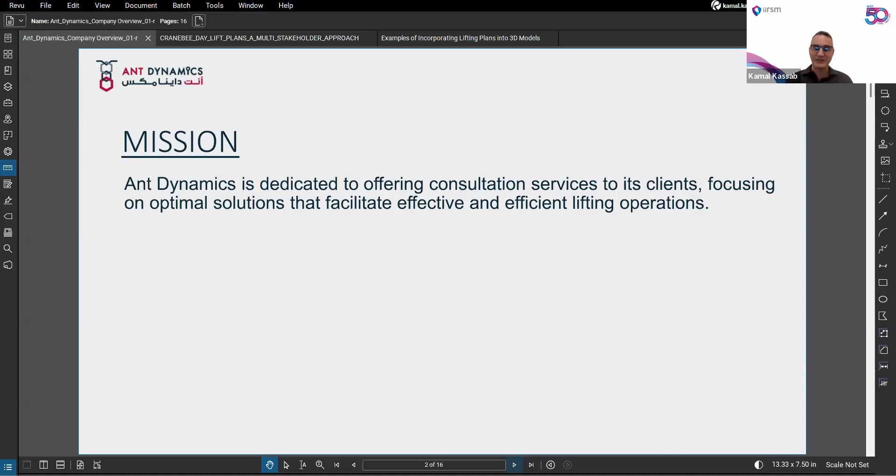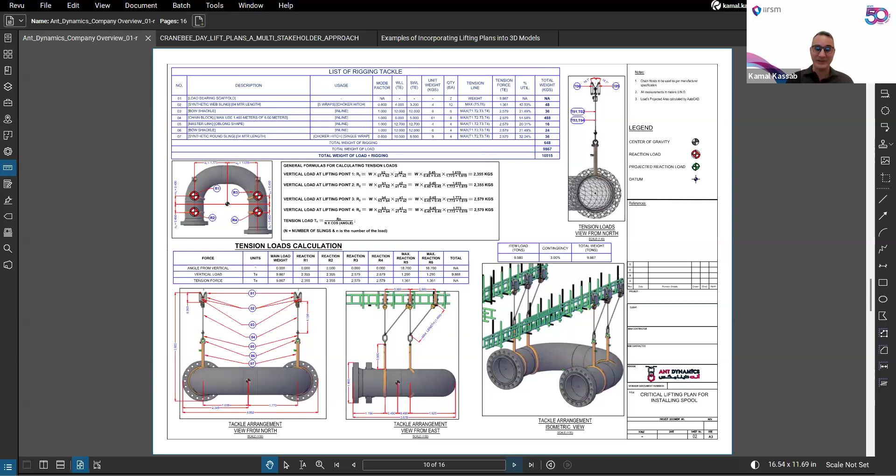We do a lot of lift plans for single crane lifts. We also do multi-crane lifts, and alternative lifts. For example, in this case, we have a skidding operation of equipment going underneath an existing precast foundation. We also provide services for rigging. Yes, for many people it's an everyday, very easy task. However, in some cases, when you have a large spool going underneath a pipe rack, it's not so easy, and the client usually has the right to ask questions about how you're going to bring this piece of spool inside their pipe rack.

Also, by using specialized software related to lift planning, we can export to 3D models, like here. And I will show at the end of the presentation a recently added feature, which is now becoming more and more prevalent, which is to leverage reality capture, such as drone mapping, into lifting plans.

Why Ant Dynamics? Well, to be fair, I think it's safe to say we are competent engineers to take care of this specialty field. Not every contractor understands or has the ability to deliver projects on time, and a lot of the hiccups, especially at the start of the project, are due to insufficient or problematic lift planning, and how to convince the client that you really know what you're doing and that your plan is sound and safe.

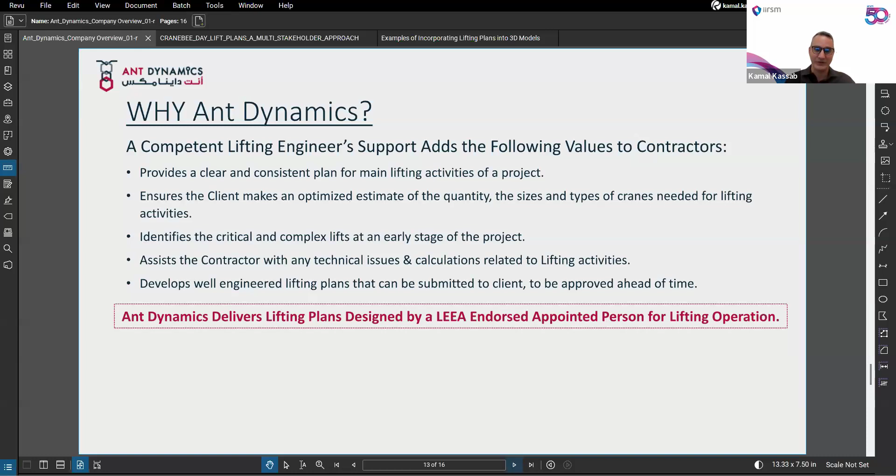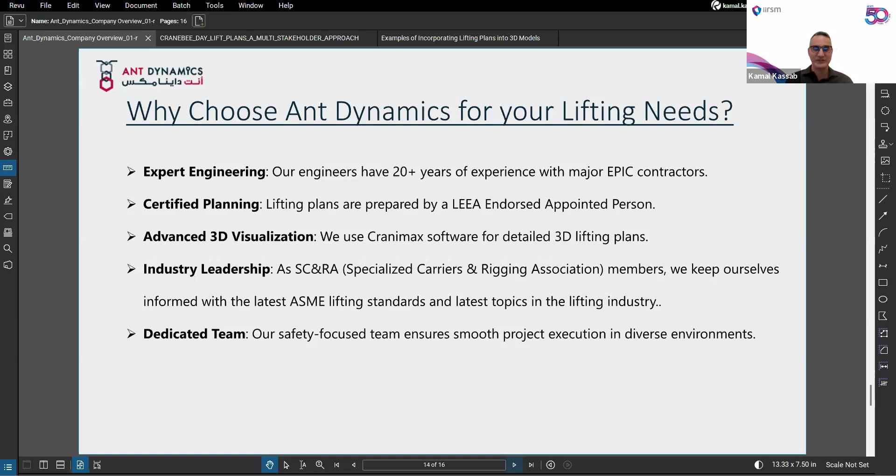Expert engineering, certified planning. Obviously lifting plans have to be endorsed by an LEEA-endorsed appointed person, which is the case. I've also taken a lot of certificates with LEEA, and I attend a lot of conferences related to LEEA and to lifting, so I'm always up to date with the latest trends. For example, the Specialized Carriers and Rigging Association conference, I travel every year to this conference and workshops to understand what's happening. Also, as the agent of Cranimax in this Middle East region, we are always up to date with the latest innovations in software and how to leverage it to improve lifting plans.

I will start now and go ahead with the presentation itself. Are you able to see the presentation? Yes. A multi-stakeholder approach to lift planning development. Can you see that? Oh, yes, we can see that.

Very good. So let's get started with this very interesting presentation, and I want to challenge or help other people understand that lifting plans are not just for lifting engineers or the safety officers or the safety supervisor or the rigging supervisor. There are different levels of lifting plans, and we have to understand which lifting plan is meant for whom. So let's get started, and I hope you enjoy.

The role of lifting plans. Lifting plans are essential for safe lifting. Everybody knows this. I think it's an opportunity to analyze the risks, collect the data, and basically plan the lift.

So as an analogy, if you are going on a flight and the captain doesn't have a flight plan, would it be safe to fly? Would you feel safe flying the plane? Wouldn't the captain want to know what the weather is like, if there's fog in the other city, the wind speed, the weather conditions? They have to check the fuel, they have to check the luggage, the weights; all of that is the flight plan.

Similarly, when you want to do a lifting operation, it is always good to have a plan to know what you're going to lift, what is the weight, what is the path you're going to go through, has the ground been checked. This is routine, but do we really understand this? A lifting plan has a purpose. It's not just mandatory because the client says so. Because if something does go wrong during lifting, then you are in trouble.

Then gravity will say, "Wait a minute, we're gonna let this thing fall over," and then chaos will happen, and whatever pennies you were trying to save by choosing to do something without a proper lifting plan or without the proper assessments is very costly. So that's why it's always good to have lifting plans, and that's why a lot of clients rightly demand that their contractors show them a lifting plan to demonstrate that they know what they're doing.

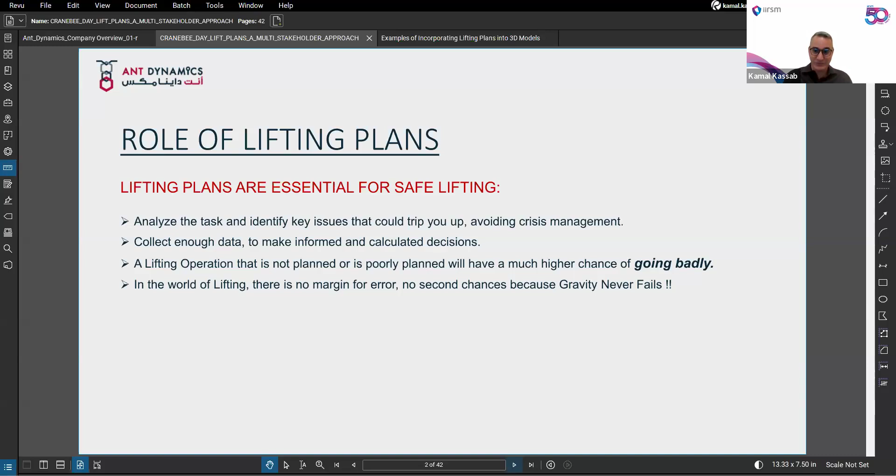There are a lot of requirements, industry standards. Some of them are by procedure, some of them are standards. So as an example, international standards, I can think of the ASME P30.1, which personally is my favorite because it talks a lot about lifting plans in detail, and it talks a lot about how to calculate and how to reach the right conclusions. BS 7121 obviously is another good standard. However, I do feel that more work has to be done to talk about the lifting plan drawings as a whole.

Where I work, which is in Qatar, a lot of lifting plans and procedures are found in the company procedures of the plants that actually allow or have work within their plants. So, for example, there is the Qatar Energy lifting procedure called Corporate Lifting Equipment Regulation. There is the Qatar Energy LNG Code of Practice for Lifting. There is also the new, recently added, very detailed major project lifting Code of Practice procedure, which I am now working on. It is very similar to the PRC 013. However, it does differ in the details.

And for anyone taking up a project with Qatar Energy LNG, I would definitely recommend that you read this PRC 015, because if you don't understand it very well, you'll be in for a lot of surprises. So it's good to know before you get started. Then there is the GTL project, which is also one of my favorite procedures because it's very well written and covers almost every aspect of lift planning.

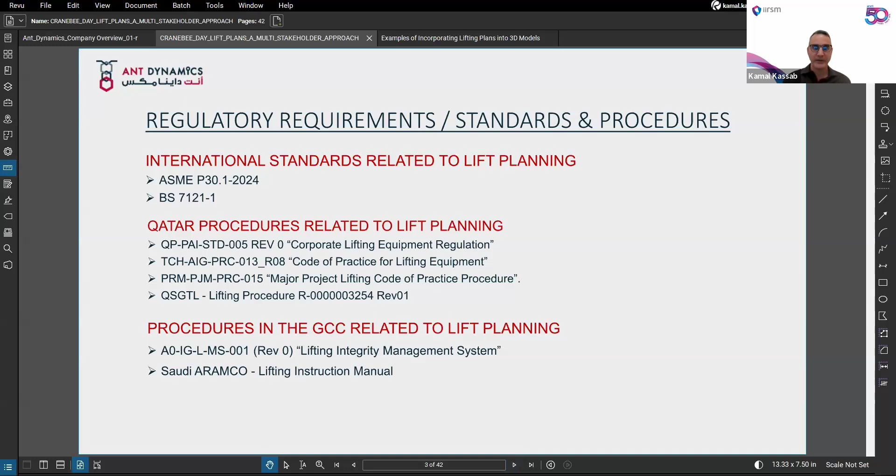Having worked with different procedures and standards, I have noticed the following. Most of the standards talk about the workflow, the roles and responsibilities, the QA/QC, and a lot of documentation and certification. So for example, this is the ASME P30.1 2024, which has been recently updated. This 2024 is a new issue; it's been around for about a year now, a little bit more. They talk about how to categorize lifting plans and the role and duties of everyone involved.

The nice thing about it is that they talk in depth about ground bearing pressure and ground bearing capacities and how to do the test, not just what the values are. So it's a very practical standard, or best practice standard. It is not compulsory, but it is a very good guide. And they also talk about lifting plans as a drawing, the bare minimum information that needs to be there.

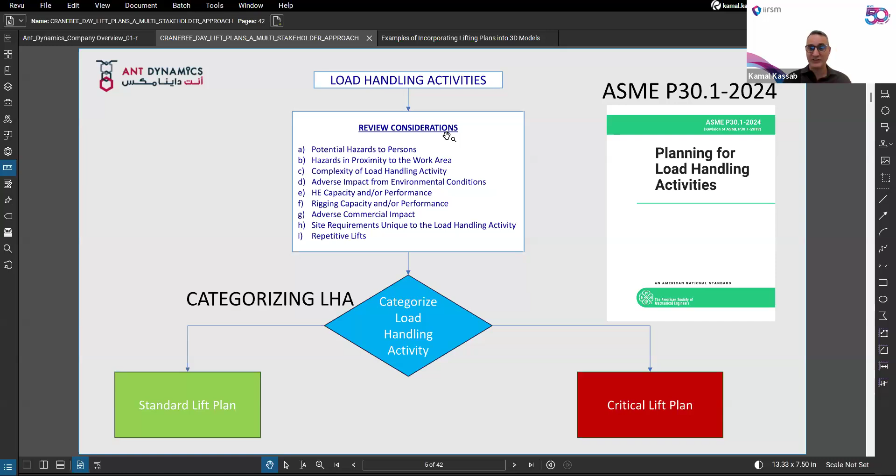However, despite reading over almost 100 pages of this procedure, till today I do not see a clear-cut understanding of what a lifting plan must entail. So you see a lot of people talking about lifting plans, but everybody understands lifting plan differently. A planning engineer would think of lifting plan one way, whereas the site engineer would look for other stuff, and the crane rental company would be more interested in other things. And hopefully by the end of this presentation, it will be clear to everyone what everybody should see and what is the amount of detail that should be given per lifting plan.

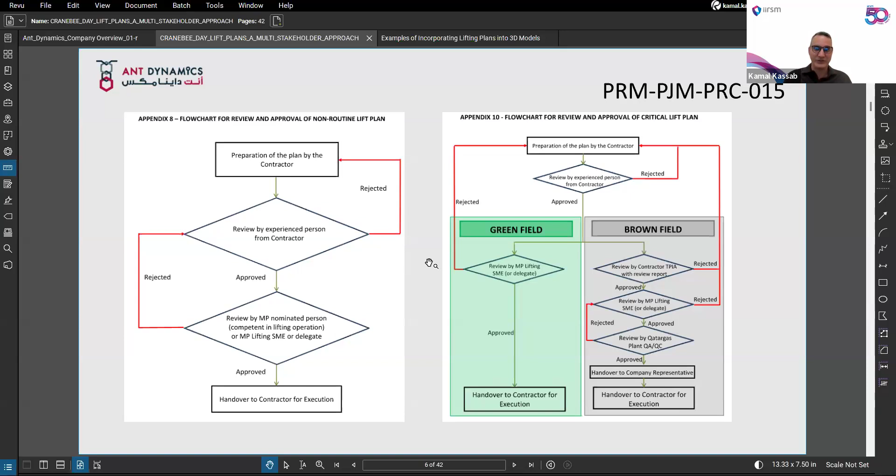So this is what I just mentioned. They do not focus on the specific requirement of the lifting plan drawings. And the lifting plan drawing is the jewel of the lifting plan package. For example, if I have to lift a compressor, I don't just give my client a drawing showing the crane position and the compressor and how I'm lifting. No, I have to give them a package which would contain a method statement, a cover sheet, certificates of the slings, of the rigging, the shackles, the crane certificates, the load chart, the crane operator, all of that. However, it is impossible to do a package without the drawing. So the drawing is the jewel of the lifting plan package.

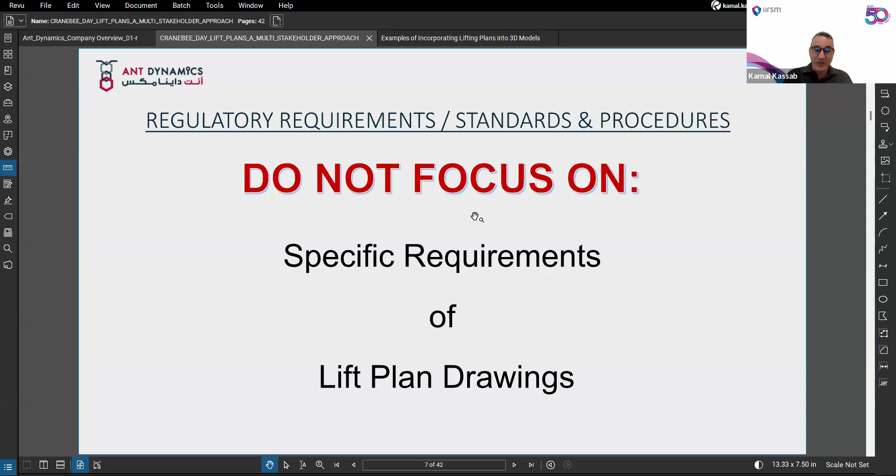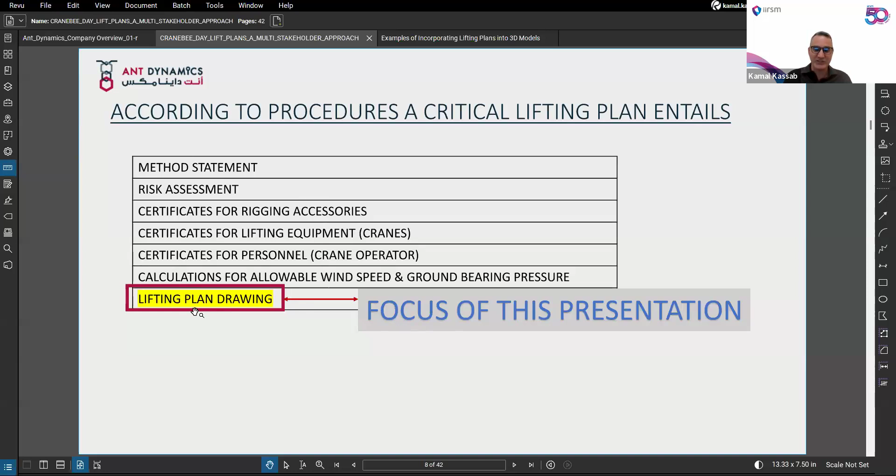So here again are some of the parts of the package. Of course, every client may request more information. However, all of them will look for this part which I highlighted, which is the lifting plan drawing, and this will be the focus of this presentation.

So there is a myth: a lifting plan is a safety requirement only. That's the myth. Actually, no. There are many stakeholders involved in lifting operations. Even those who are not on the field directly are being affected every day by the lifting operation. So it's important to always identify the key stakeholders. I'll mention some of them.

So you have the lift directors. In this case, it could be the lifting superintendent, the lifting engineer, appointed person, the crane owner, the crane operator, the riggers, the construction managers. Of course, construction managers are affected because they have to deliver on time and in a meaningful way. The planning engineer, the cost engineer, the crane rental company, all of these are affected by a lifting operation, even if they are not standing next to the crane during the lift. I can mention more.

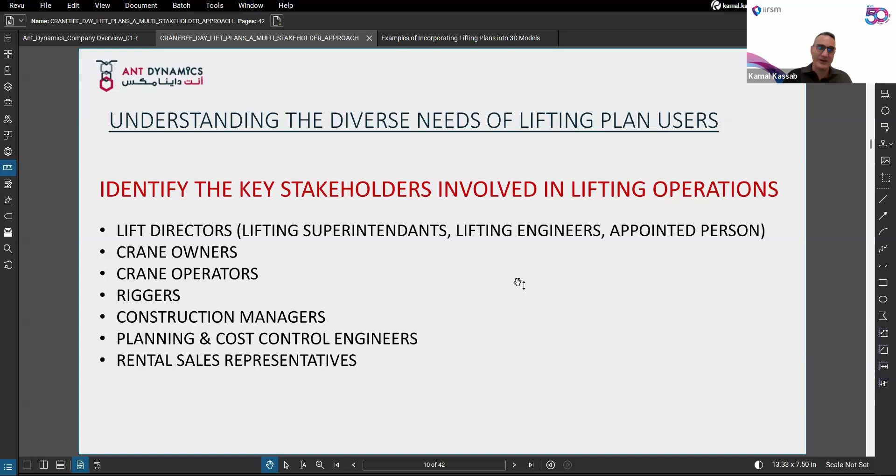Let's say you are in a neighborhood. Like now, there's a crane next to a hotel that I'm living next to, and this crane has blocked the road. So all the people in the area have to now do a detour, which is part of the reason I just arrived. What used to take me like 5 minutes now takes me around 20 minutes. So cranes are huge pieces of equipment, and they will always have an effect whenever they are working. They will always influence other areas, even those people not involved in lifting.

Developing a lifting plan. A lot of companies who work in lifting have this mistaken assumption that the lifting plan is one go. So you give the drawing to one person, and this person is expected to develop the plan. Okay, I have a foundation to lift. No problem, give it to the lifting engineer, he will make it. No, and no. Lifting plans are the result of an iterative cycle. A lot of communication, a lot of back and forth has to go on.

So the first part is to gather the information. Gathering information means knowing what is in the surroundings, getting the weight of the item you're going to lift, understanding the limitations in the area. Then the person doing the lifting plan, which I would call the supplier in this case, has to provide a rough sketch: okay, I plan to put my crane in this location, gets feedback, a lot of feedback, and this is an iterative part.

Then submit the detailed drawing, and again wait for comments, maybe from the main contractor, maybe from the client, maybe from the main stakeholder. So it is important to remember that lifting plans are not done in one step. They are the result of an iterative cycle, in some cases many iterative cycles, and a lot of discussions.

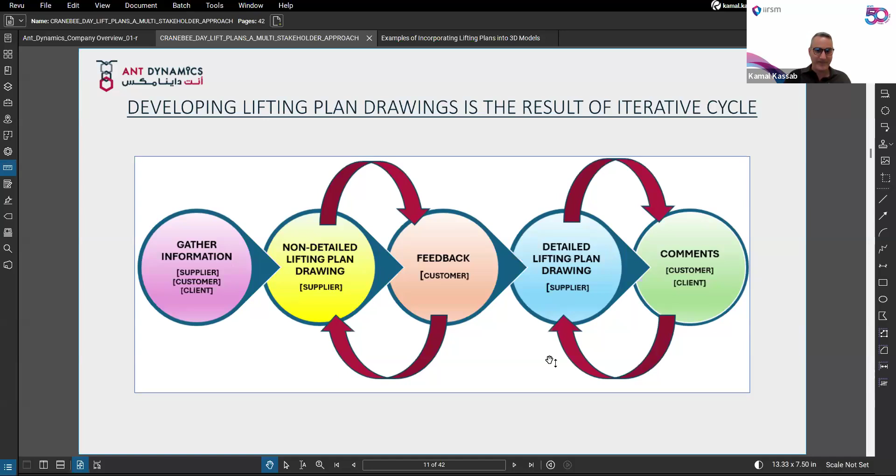So I will talk a little bit about the limitations of the conventional way, what I see a lot of. So a lot of people, what they do, they have a draftsman. This draftsman has to do the drawing, takes the feedback from the supervisor, and back and forth. The problem with this method is that you cannot expect the person making the drawing to know all the givens, all the data that will affect the drawing, that will affect the lift.

So, the conventional way is to have a draftsman taking instructions from an engineer or from a supervisor and do the drawing. So the draftsman has to do at least 50% of the work and the decision making, such as selecting the crane, selecting the crane configuration, and then the person who is in charge would have to review that drawing.

There are many ways that could go wrong here. For example, this takes a lot of time. It's a laborious effort. There isn't too much time for iterations. So you'd have to wait until the final drawing is ready. So I have to wait for the draftsman to finish drawing the crane, put the slings, put the shackles, put all the details, in one go.

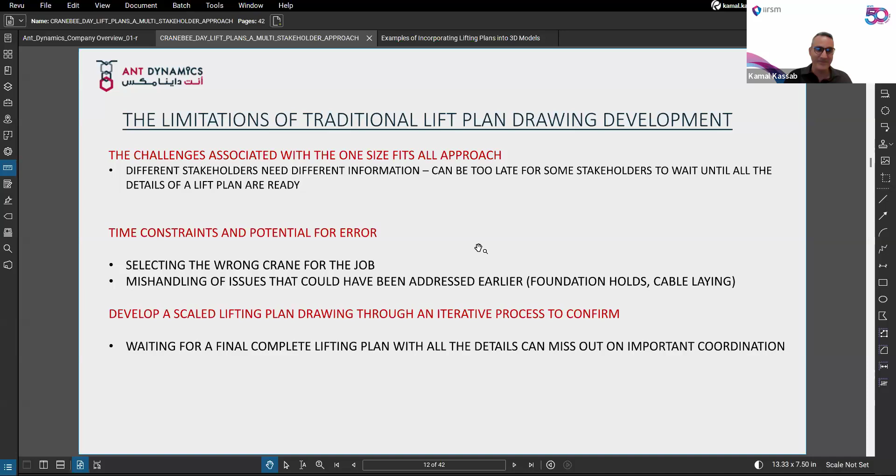So I have another proposal, which when I quote to other companies, this is the process that I would prefer. Like other digital construction, like building information modeling, there is something called level of detail. And what this allows is better planning, more focus on planning, and then to develop the details as the project goes on. It is easier for someone like me to develop a high-level lifting plan rather than to focus on the nuts and bolts of the detailed lifting plan.

So it's easier for me, for example, to develop many lifting plans at a very high level for the same project, all right? And I call this level 1. At this stage, I would choose the crane type and the location. So if someone tells me I have a compressor to lift, we know that the crane has to be located in a certain area. And I would say, I need a mobile crane, or a hydraulic crane, or a crawler crane in this case.

And then we can sit and focus on the exact size and stuff. Then as the project goes, here I'm putting 6 months before. This is the ideal case. 3 months before the lift, you should have decided on the crane type, the size, and the location, which means that I need an all-terrain crane, a 250-ton all-terrain crane, and I need it to be in a certain location.

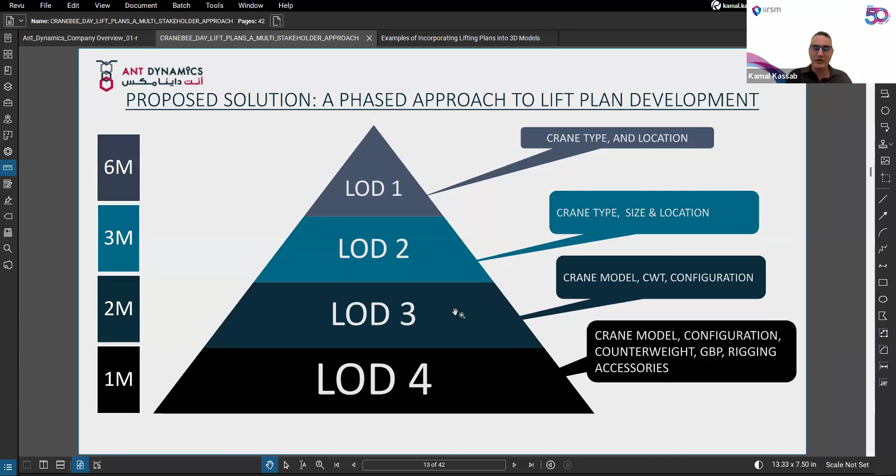So what this means is if you keep waiting until the last minute to give that one lifting plan drawing in detail, the contractor may find themselves ending up paying more, with more frustration and more delays—just not an efficient way of saving money.

So a little discussion about each one, I'll just go briefly through these. I had to write everything down just to keep this presentation detailed enough. However, I'll skim through this in detail.

Level of detail 2, you'd have to know the crane size and the beneficiaries of this—the crane owners, the construction managers. So let's say I want to hire a crane, you would tell your procurement or subcontracts department, please start looking for a crane in the market, I need it after 3 or 4 months. That will give your guys a lot of time, enough time to go and make their inquiries and select the best price rather than wait for the last minute and rush to get a crane.

Phase 2, the detailed lifting plan, level 3. By this time, you know which crane you want to get. Again, you have more details, more information, and you start honing in on the planning stage.

Phase 3, which is to actually execute the work. Basically by this stage, all the details are there, and by now you are executing the work. It is too late by this stage. So if you're going to do a lift after, let's say, 2 weeks, and you haven't decided on the crane size, you haven't decided on the slings and shackles you're going to use, then I would say you are already in trouble because it's too late to make any big decisions that may facilitate your lift.

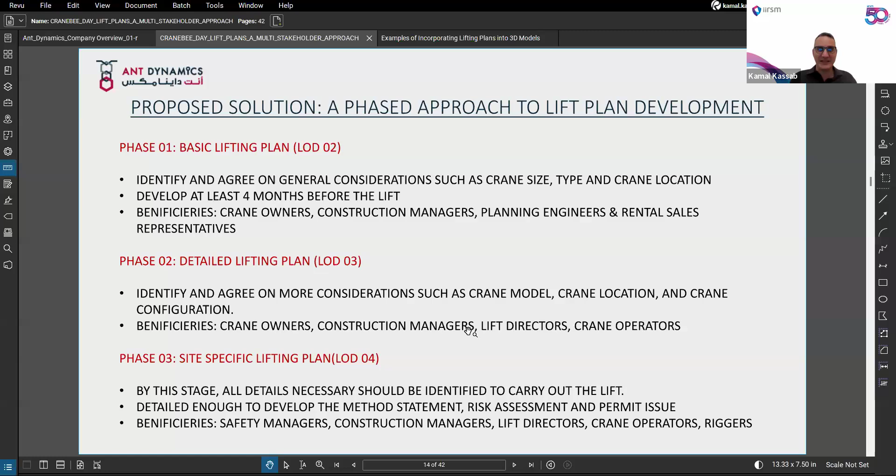Beneficiaries of all of this are the lifting managers, site managers, the lift directors. Really this is a way of understanding that you have an overall approach when you think of lifting plans—keep in mind that there are many people, many stakeholders involved, so the approach would change.

So let's start here by talking a little bit, showing you some examples of lifting plan drawings, level of details. The definition of a lifting plan drawing: it's an A3 size scaled drawing. And I say scaled—it has to be scaled because without scaling your drawings, you won't be able to determine the clashes properly.

Sometimes I see people trying to get away with sketches, like drawing a box here and lines and arrows and whatever. Yeah, that's a schematic, that's not a real lifting plan drawing, and that's not really going to give anyone a clear idea of what's going on. Chances are, if you take this piece of paper to the site and try to apply and execute your lifting, you're going to be asking your lifting supervisor to start improvising, to come up with a solution while standing on their feet, under pressure.

So really, in this case, you are transferring the responsibility of the lifting engineer, or the party that's supposed to provide the lifting plan, onto the lifting supervisor. And in some cases, the lifting supervisor will transfer this responsibility onto the crane operator. Then you end up saying, okay, I have the permit, but the permit doesn't match the reality.

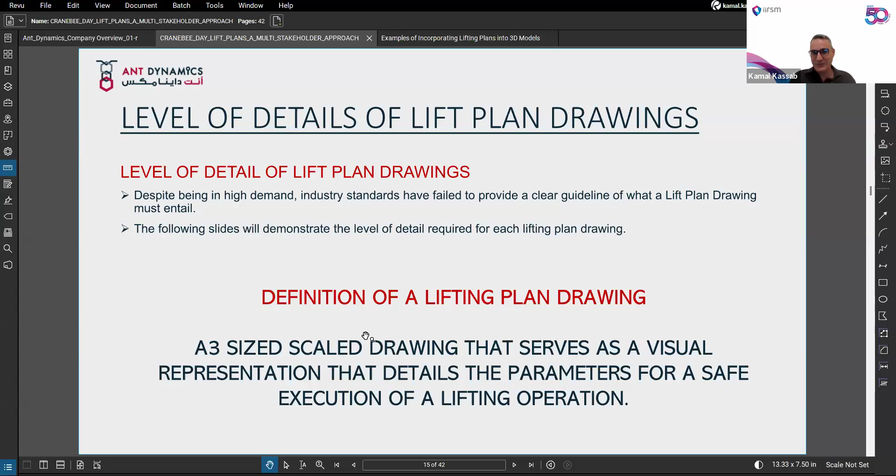Personally, when I do my lifting plans, I don't just do it to get the approvals. I do it because I think about the end user, the riggers, the rigging supervisor. I want to make sure that there's nothing in doubt, and if they see the drawing, they would come back with meaningful comments to make changes in case there are any. So it's important to have your lifting plan drawing to be as clear as possible and to be submitted or shared as early as possible.

Here's an example of a level 1 detail lifting. This is like 1 year before the job. This was given to me a year before, this job hasn't even started. So the project manager was wise enough to say, look, I want a very detailed, not too detailed, but enough information to plan my crane setup, where it's going to be located. So here you can see the crane, you can see the type of the crane, the size of the crane. And this is mainly for the project manager, project engineer, the planning engineers. This is even before the supervisor, the rigging team comes to site even, before they even mobilize the site.

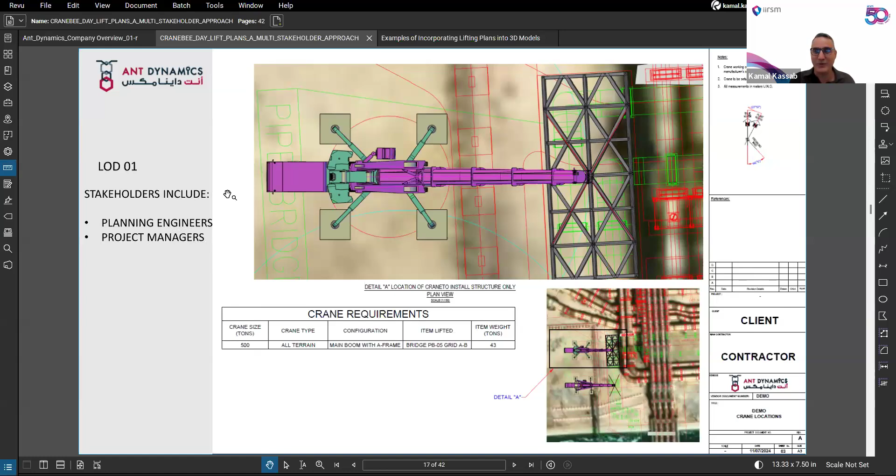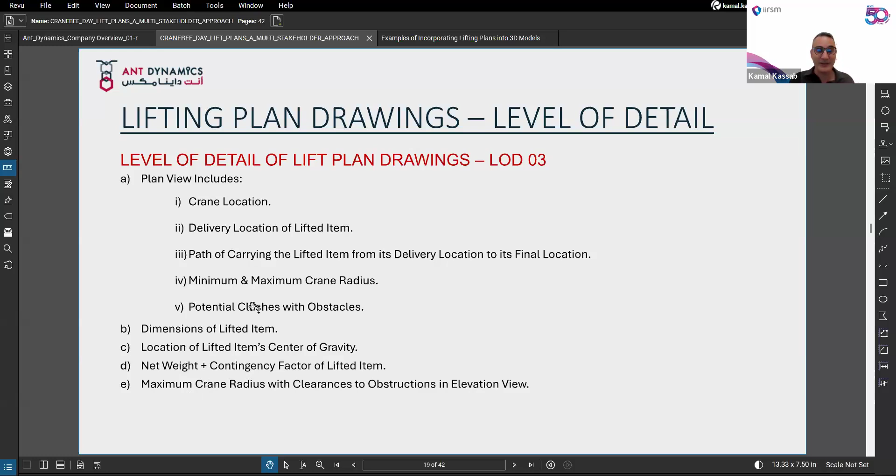Then you have the level of detail 2. So in this case, you have the crane location, the dimensions of the load, the minimum and maximum radius, the crane type, the boom length, the configuration. So you have a little more details than what you just saw earlier. A level of detail 3, a little more details than level of detail 2. So here you have, for example, contingency factors, the location where you're going to pick up. So this would really help

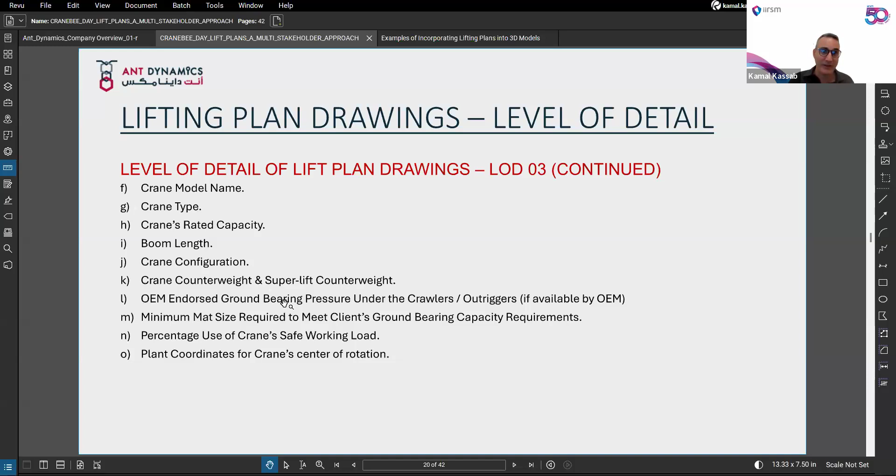the planning team. And at this stage, for example, the procurement would have enough information to go and search for the crane in the market. So you have the boom length, you have all the ground bearing pressures, so your civil team can go and check if the ground is good enough or not. Percentage of the crane safe working load, so you know that this is going to comply with your client's requirements or not. And it's enough information, I would say, for proper coordination with all other disciplines.

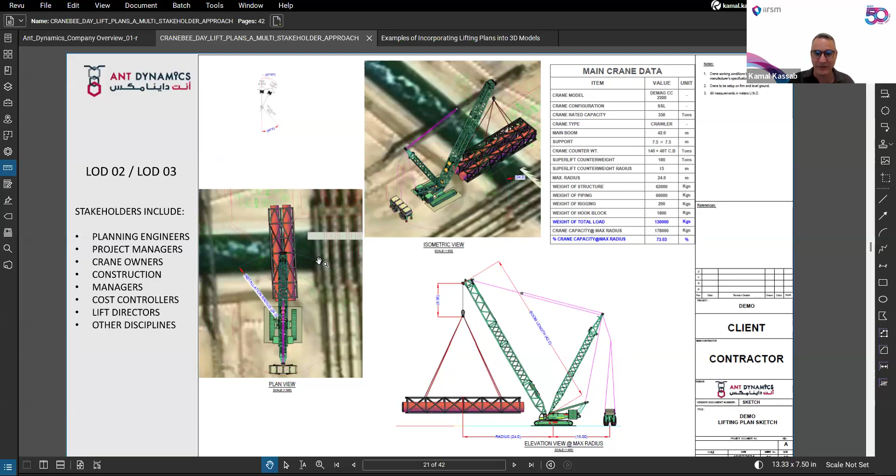So this would be available, let's say, 2 months before the lifting takes place. Now for the full level of details, and this would vary depending on the project and depending on the client. So if you're working with Qatar Energy, they would make some requests. If you're working in a brownfield area, the client would have another set of requests. If you're working with Qatar Energy LNG, for example, or with British Petroleum, they would have another set of rules. Shell have another set of rules. So at this stage, level 4 detail, it is very important that you understand your client's requirements.

It is very important, before you start even mobilizing your cranes, to know what requirements your client needs to see, to feel confident that you can do the lift. From this level of detail 4, and sometimes level 5, you use this drawing to start preparing your package to get the permit to go ahead and do the lift.

I'm not going to go through all the details here, but at this stage you should be able to point out potential clashes with existing obstacles. For example, if there's a tree, a light post, or a structure in the way, all of this should be highlighted - actually even in level 3. The exact location of the center of gravity,

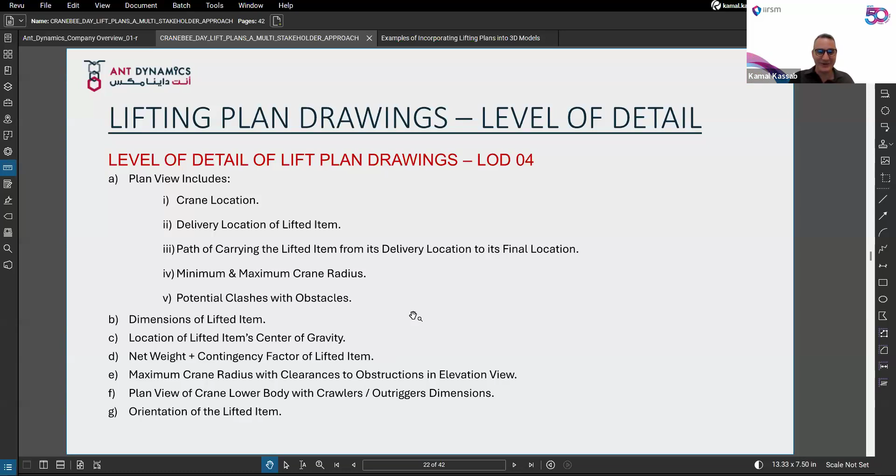and the orientation of the item. Sometimes rigging teams install a vessel in the wrong orientation, and then they have to come back, lift it out, reorient it, and put it back in. That's a lot of inefficiency, I would say.

Crane configuration, capacity of the hook block, the detail of the hook block, the mat size, the coordinates, the spreader beam - so you can go find the certificate for the spreader beam, get the NDT and all the MPI tests if you want to check the weld, inspect the spreader beam, all these details. All the details which are enough for the rigging team to execute should be in this level of detail 4. So now we've gone from high level project management and cost control to the execution level.

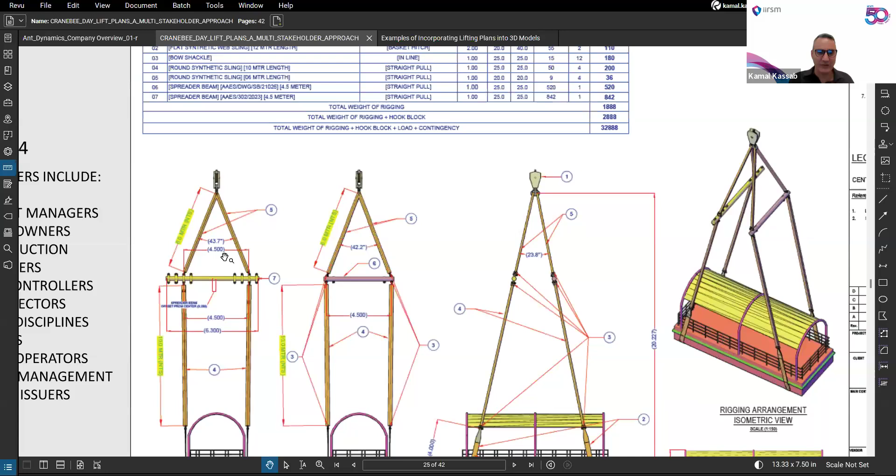And here also a detail of the rigging arrangement. It has to be very clear for everyone to see - the rigging supervisor, the crane operator, and all those involved. Here also you have a description of the exact rigging tackles, so they can go and check if they're available or not.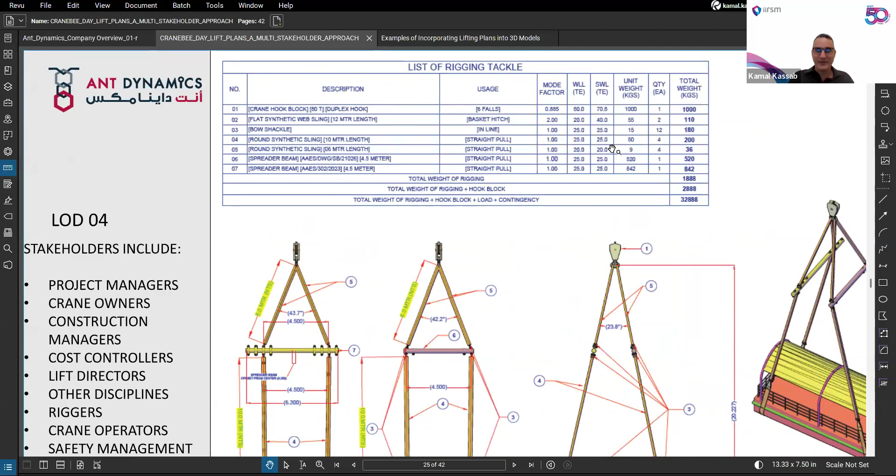It's a good practice to have a list of the rigging gear you're going to use. This makes it very easy for your material person or storekeeper to get themselves ready and prepare the stuff needed to do the lift. The last thing you want to do is start searching for equipment and rigging accessories right on the day of the lift, which is guaranteed to result in delays.

So here's an example of a lifting plan, level of detail 1. You just have the crane and the location - crane location.

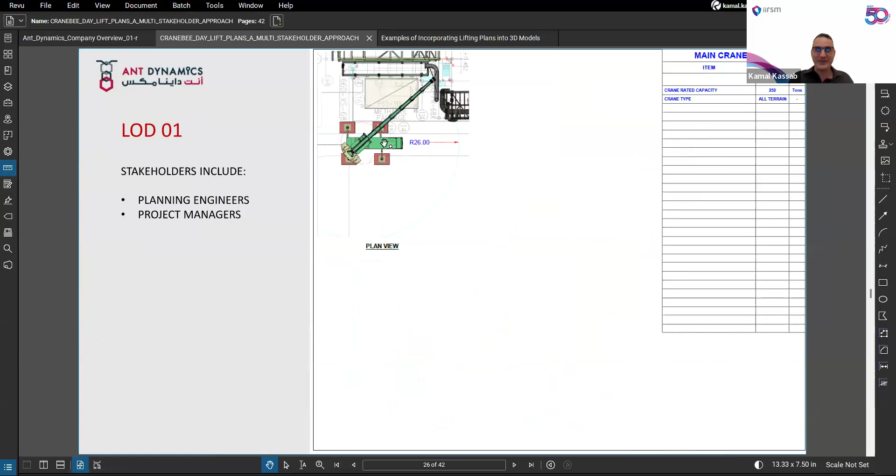Level of detail 2 - this table starts to fill up. You have the coordinates, the crane type, the crane size - no detailed crane model - and a basic, rough estimate of what percentage of the crane capacity you would be using.

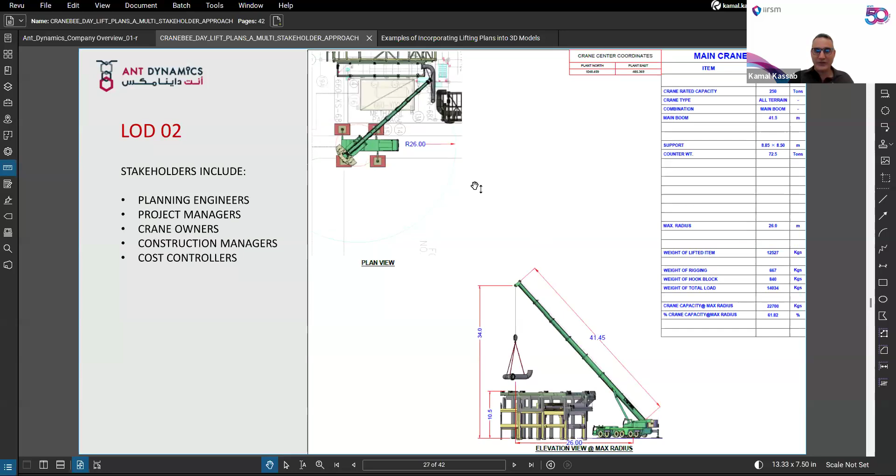You go to level of detail 3, so now you can see I've specified the pickup point - this assembly location where I'm going to pick up the load from. Maybe another party in the project wants to use this area, so it's important that this is shared with everyone. And if you can put it even on the 3D model itself, that would be good because everybody can see it.

I've also added the crane model, a specific crane model, so your procurement can go and select this type or equivalent, the counterweight exactly, how much. Contingency factors - this data has to be filled up. So here the stakeholders are basically the project managers, the crane owners, the cost controllers, and other disciplines who might be affected by this.

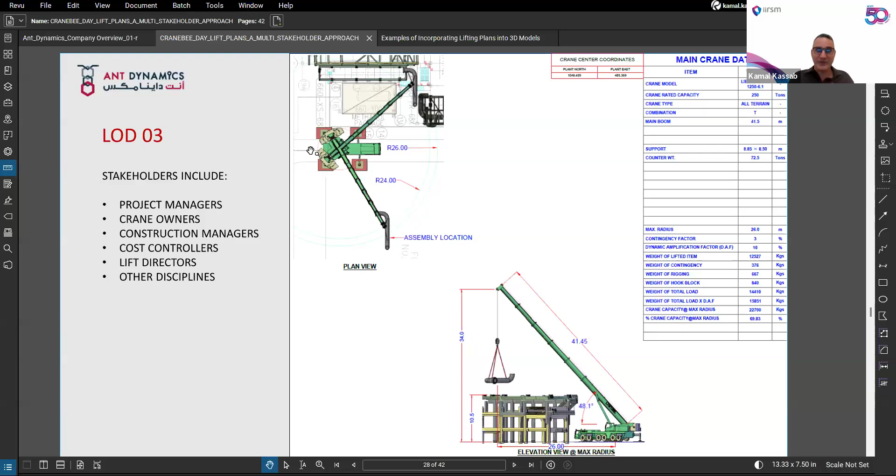For example, if a civil engineer wants to dig up a hole in this area, they come and tell you, hey, can you put your pipe somewhere else, can you assemble it somewhere else. At least give them the chance to tell you this before they dig up the area, and then you find out, oh no, I cannot pick from here, I have to shift my crane a little bit back. It's just stuff that does happen.

Here's the level of detail of 4. By this stage, all the information, all the data have been filled up. My client wants to see the matting arrangement, the height, the boom tip height, the clearance from the building.

This is really the stuff you need to present to get the permit and the go ahead to go and lift. Everybody here is probably involved in this case, but what you didn't see before is that the riggers are now involved, the crane operator is involved, the permit issuer is involved. So you have so many stakeholders here.

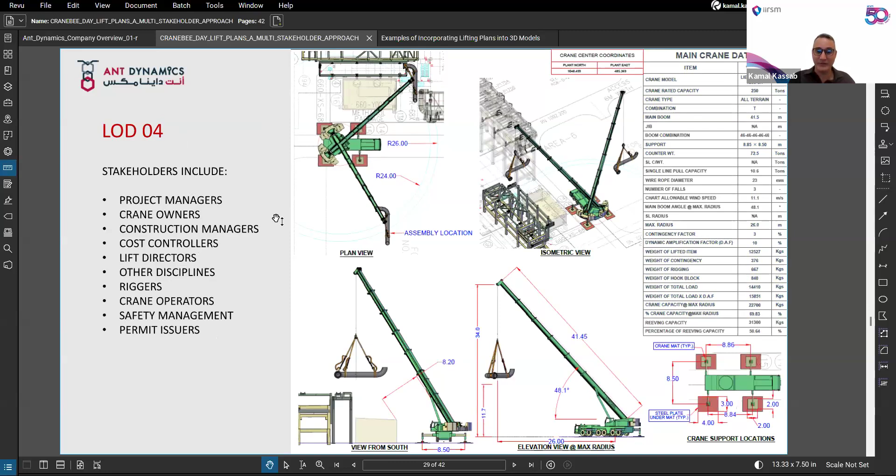By stakeholders, I mean all those who are actually going to be affected or involved in the lifting operation. Sometimes the client may want to see more information, for example the tension load on the slings, because some clients want to make sure that you're not using the slings beyond 75% of its capacity. So you have to show all of that.

Depending on your client's needs, it's always important to check with them first before you submit a drawing, because this is a very subjective field. So far in this industry we don't have black and white requirements for what can qualify as a lifting plan. That's why I'd recommend always sitting down with your client, consulting with them, and seeing what is acceptable for them or not. Get their word, and then submit based on what is agreed.

Don't agree on one thing and then send them something that's short of what they asked for, because it's not a very nice feeling. The most important thing about lift planning is, like I said, communication and building trust with your client.

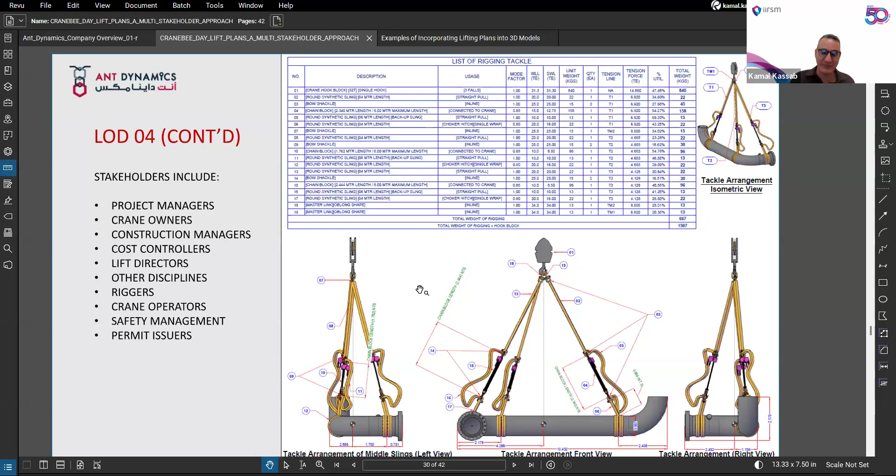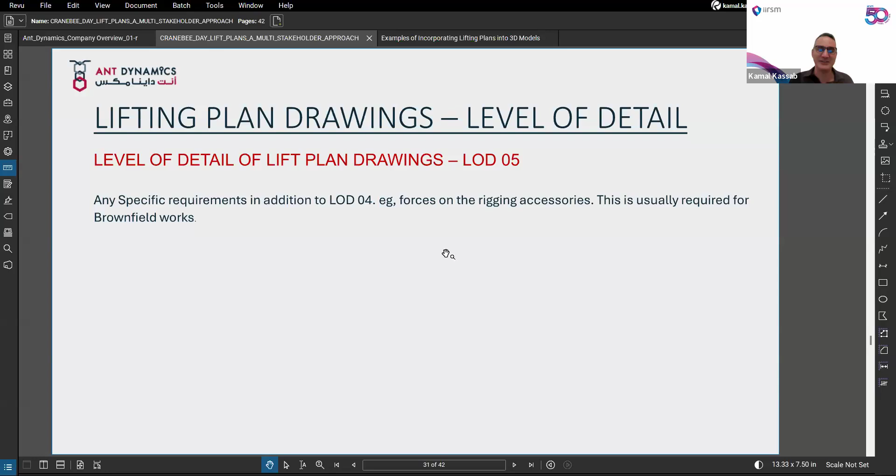Now I'll mention level of detail 5, and this is something you'd find more or less in brownfield work, which is when the client starts to ask for engineered calculations on the rigging, on the slings. Not very common, but is requested sometimes. I know it is not only requested, it is mandatory when you work offshore.

You have a lot of offshore minds coming to onshore, and they have every right to say, hey, the same level of control I used to have in the offshore environment, I want it onshore, that's what makes me feel comfortable. So yes, sometimes you're asked to do even more detailed calculations in this fashion to convince your client that the slings are being used correctly, that your shackle is not overloaded, for example.

At this stage, this isn't going to affect the planning engineer and project manager directly, but it's important for them to understand that a lot of work goes into these highly detailed lifting plan drawings. So maybe the project manager would wonder, when we started the project and were getting these lifting plan drawings, they didn't understand that what they were seeing was like level of detail 1.

But now they're seeing that the lifting plan drawing is requiring 3 or 4 days, and they're confused why this is happening. The reason is there's more work to be done, more calculations, more checks to be performed. So they would think, maybe at the stage of execution I might need 3 lifting engineers or 3 lift planners or 5 draftsmen instead of the 1 or 2 I started with. This helps them understand how to plan their manpower accordingly.

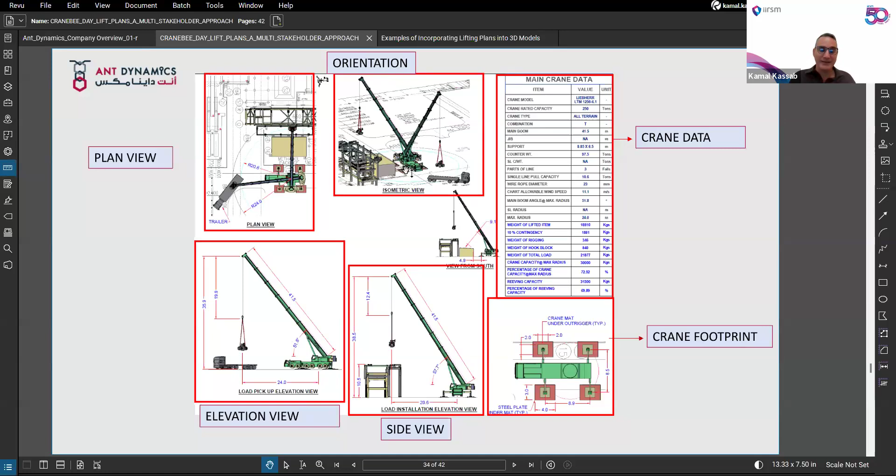We are human beings and we are used to looking at things in a 3D environment, so I'm a big fan of 3D lifting plans. Other people are not, but that's just my opinion. The clearer the plan, the better the execution, and the better the feedback even.

It's also important to show the list of rigging accessories that are going to be used. Always include this, and if you make it as a table, it is always clearer than to show arrows pointing to a sling or a shackle, just putting the bare minimum to get approval from your client. In my view, when you're doing a lifting plan, you should always have the end user in mind, not just the guy who's going to approve your drawing, because that's no good.

I mean, you want your lift to be done properly, clearly, and without pressure. The more hours you put on your lifting plan drawing, the clearer you make it, the faster the execution will go. And in my view, I don't have a problem making my drawings 3 pages, 4 sheets, 5 sheets, regardless.

There's nothing that says you are limited to 2 sheets maximum on a lifting plan drawing. I see a lot of contractors try to squeeze all the information into one drawing, and it ends up looking very difficult to read.

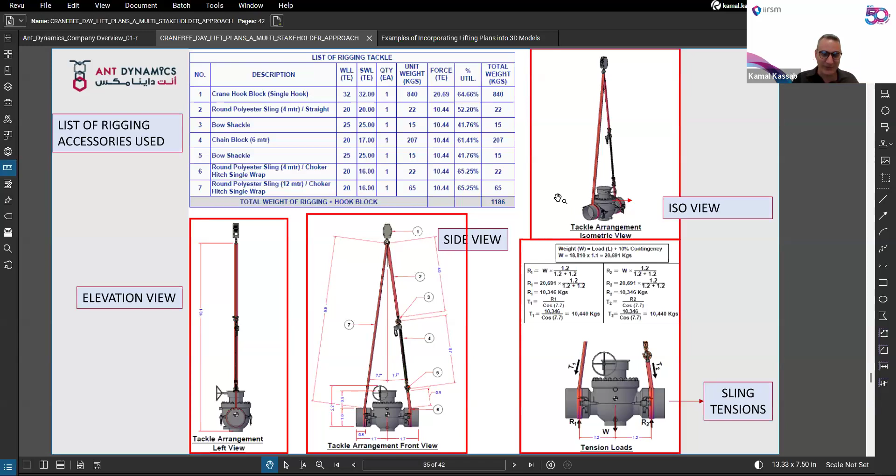Ground bearing pressures. I do see a lot of rules of thumb being used, and a lot of formulas being invented, Excel sheets, sometimes wrongly by the client, I have to say. The right way to get ground bearing pressure is to get it from the manufacturer.

Calculating ground bearing pressure is a laborious task. It requires the user to know the weight of each part of the crane and the location of the center of gravity of each part, and to calculate the cumulative center of gravity between the crane, the counterweight, and the load, then divide it by the footing area, the crane footprint. In the case of a crawler, you would have to know if the ground is hard or soft.

The best way to get this is always to go through the crane manufacturer. Every crane manufacturer now is making their ground bearing calculations available to users. So there's no real excuse to just go and say, yeah, I'm going to assume the crane weighs, I don't know, 100 tons and the load weighs I don't know how much, and I'll just multiply by a factor and I'm good to go.

No, this is not the right way. It's just so wrong on many levels. It's not even a calculation in my view - it's just basically taking a wild guess and convincing yourself that it's a calculation. I have news for you: it is not a calculation.

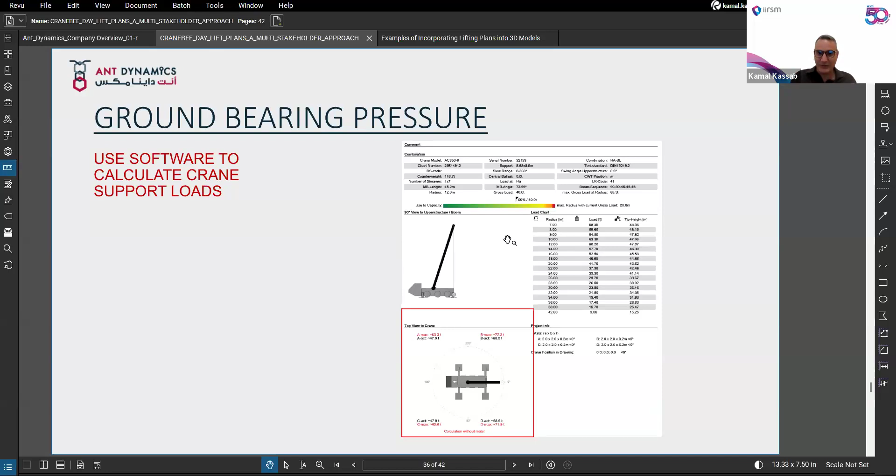Some software used to create lifting plans.

I would say it's very strange that companies are willing to pay 20% of the total budget, even more, but at least 20% of their budget is on crane rentals and crane usage. However, they invest less than 1%, and in some cases less than 0.5% of their budget on the planning. The planning can save you. So if you invest a little bit more on the lifting plans, you would save your project a lot of money on crane rentals.

Developing lifting plans using conventional tools like AutoCAD and relying on your draftsman. I'm sorry to say, I know maybe in the audience I have a lot of draftsmen here, but the draftsman alone cannot go through all the load charts of every single crane model to get the best result. It's humanly impossible. Even the lifting engineer cannot do that.

Some tools are there, like specialized software, CraneBee, Crane Planner, Lift Planner, whatever. They are all there. My favorite, obviously, is CraneBee because I've been using the software for over 15 years, and I actually represent Cranimax, the developers of CraneBee here. So for me, it's an excellent software, but as long as you use a software, I think that's the right way forward. At this day and age, it is always good to use software to plan your lifts. And then later on, you can draft it.

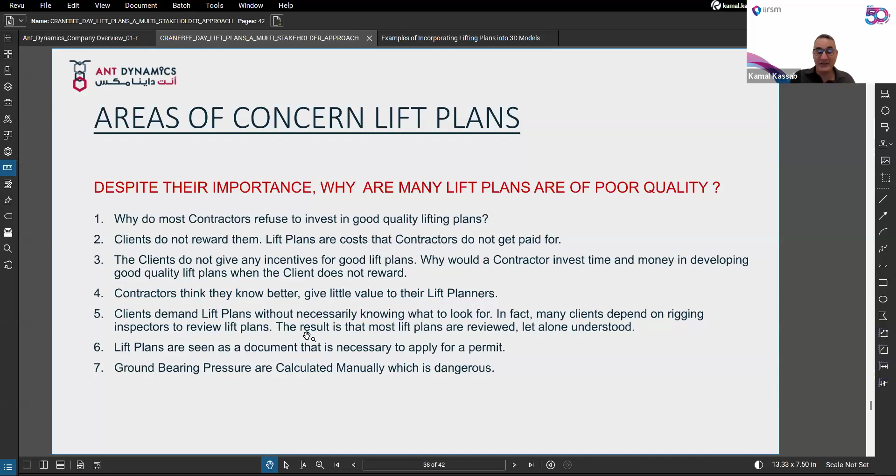So it is a big area of concern for me that till today, the lifting plan and the quality of the lifting plan is mainly driven by the requirements of the client. And if the client is going to accept bad quality lifting plans, the client is going to get bad quality lifting plans. He's not going to get any more. Let's be real here. Here are some examples of bad quality.

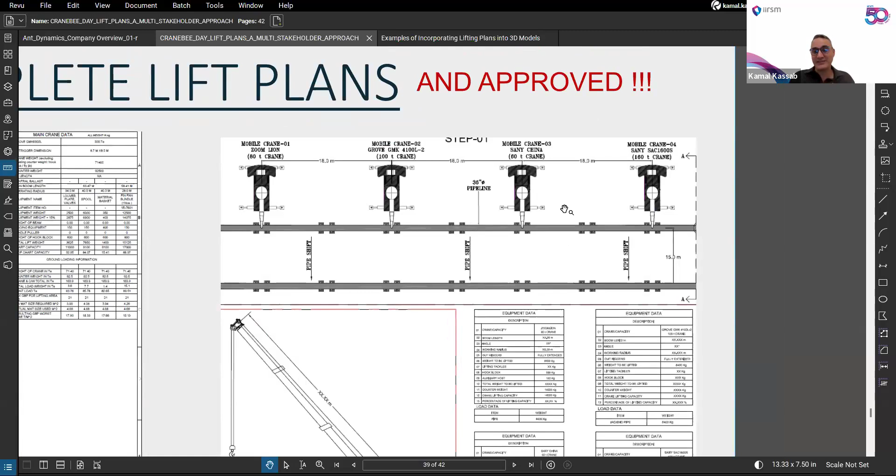So for example, here, this crane is drawn like trapezoids and circles, and it's not even drawn to scale. This doesn't even look like a crane over here. So this is like a critical lift. I mean, you have 4 cranes lifting a pipe. So if this goes to a civil project, it will probably get accepted because it has been accepted. However, when the same plan goes to oil and gas, chances are, definitely it will not be approved.

So, for example, this drawing, you see it, okay, I see a lot of lines. I understand what the draftsman is trying to say here, like, okay, this is where the crane is going to stand, but there's no real, in-depth check. This is a project I actually worked on, and this is a big crane, like a 300-ton crane. And what happened here was that this was sent to the client, and I don't want to say the client had approved it, but it was sent to the client.

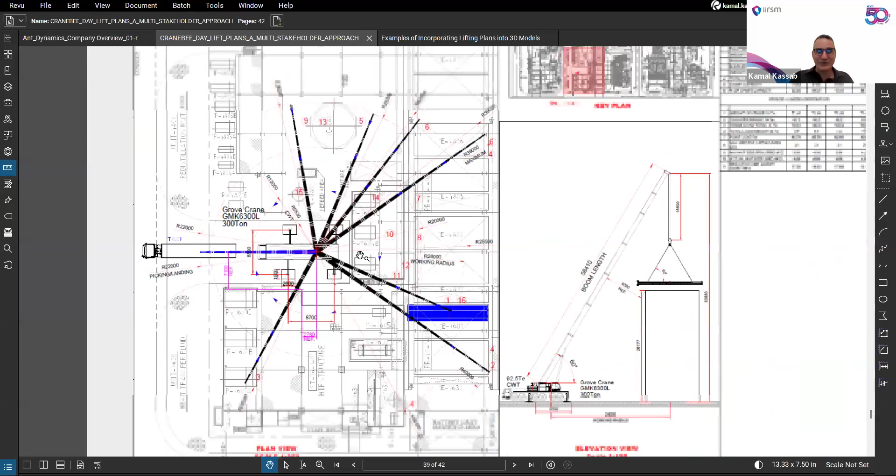But when I went and checked the site on the field, I found there were pipes in the way, there were generators, there were foundations that were not mentioned here, because the draftsman didn't know that all these things existed here. So it's important that, now with the technology we have, I don't see any excuse why these mistakes should happen, why this miscommunication should still happen. So nobody is going to be able to draw what they don't see.

So if the draftsman, and again, it's a draftsman, not a construction manager, it's a draftsman who is making the plan based on what they know, on the information that they have, you can't expect them to give you a proper plan. Because if this one had been approved by the client, and they mobilized the crane and sent the crane to that position, and you find all these things sticking out of the ground, pipes, hoses, foundations, fire hoses, yeah, it would have been a disaster.

It looks nice, but it's always good to have something more real. And that will be my next presentation, which I'll start in a few minutes.

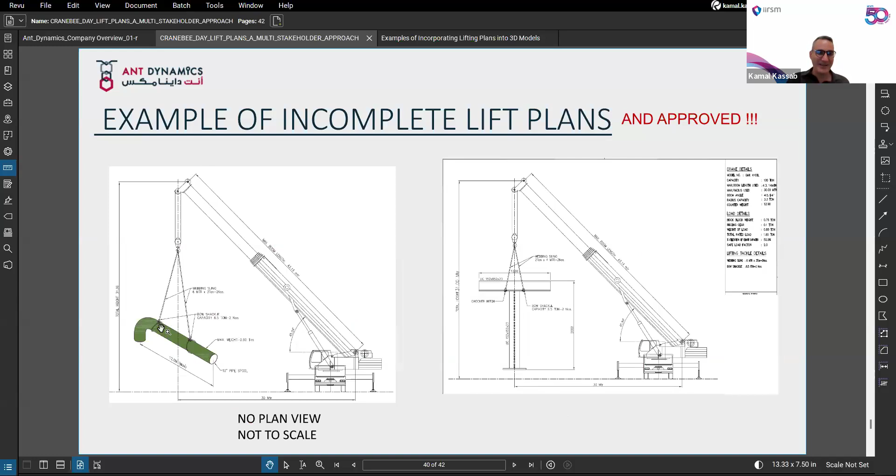Here is an example of an incomplete, in my opinion, lifting plan, and it's been approved. I mean, honestly, I would say it is scandalous. And this was approved in an oil and gas project also. So you have here a pipe, okay, a pipe, no scale, isometric drawing, no scale on the crane, no scale drawing, and somehow it gets approved.

And sometimes I see that... Well, I had another example. I didn't want to share it because it's a project I'm currently working on. You know, the length of the slings was so long that there was no way it would fit. There's no way that the crane had enough headroom to lift it. And thankfully, it was checked by the client, and they pointed it out.

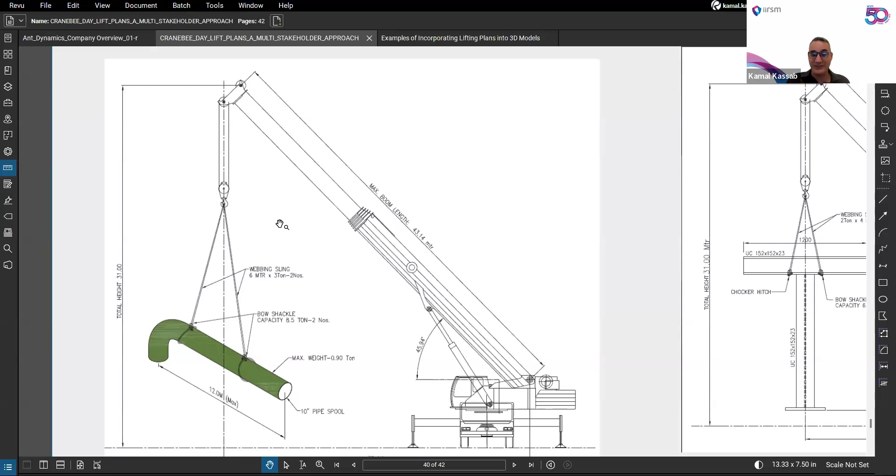And at that point, they said, "Okay, we want scale drawings and nothing other than scale drawings." It's important to have a scale drawing. I mean, it's the only way you can know whether your lifting plan is real or not. Otherwise, this is just a piece of drawing, you know, a schematic I could have done by hand.

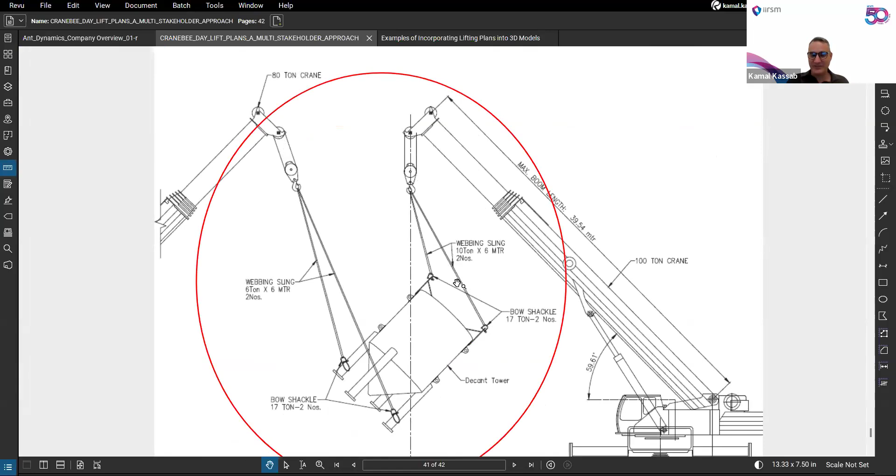Here is another example of, I don't know how this got approved. I mean, you don't even know what the shackles are. The slings are going sideways. This boom, this crane here is showing that it's being side loaded. Honestly, this shouldn't even be accepted. This is another oil and gas project, and somehow it was accepted.

And I would definitely question the guys who are approving these drawings. I mean, are they qualified to review drawings? Chances are no. When I see this being approved, I know for a fact that whoever approved this is not qualified, even though they're the client and they did the interviews and they have the certifications, whatever. I mean, they need more training, and there's got to be better ways to approve these plans.

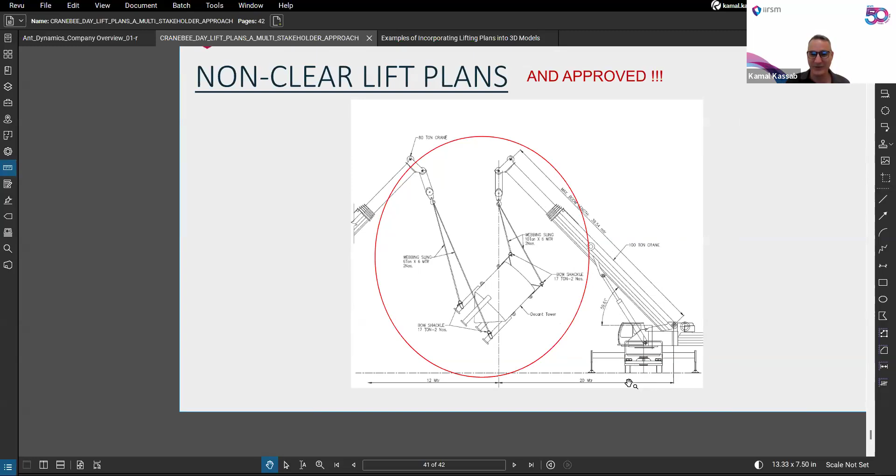These getting approved, this is just scandalous. I mean, even look at the drawing here. So this line here is showing 20 meters, and this here is showing 12 meters. To me, they look almost identical. I don't even need to scale these, but I know that the scale is definitely off, and that's 39 meters. This is a completely wrong drawing, and it's sad to see that these are being approved.

So I really don't understand who is reviewing these drawings. And this is where I fault the main clients, who know their role; they are the leaders in this. They are the ones who should be putting things in order, making sure that the drawings are correct, to have proper planning. Otherwise, you're going to be going back. We're just kidding ourselves. We're relying on the operators. We're relying on the site supervisor to improvise a lifting plan.

And when this happens, at some point they're going to run out of luck and something's going to go wrong. The purpose of the lifting plan is to give yourself the chance to go through the drawing, to go through the lift, to assess the risks involved, and to avoid any mishaps later on. There should be no surprises before the lifting takes place.

And again, I go back to comparing the flight. When you step on an airplane, you know exactly what time the flight's gonna take off, and you know exactly what time you're gonna arrive. This is all because pilots have a flight plan, there's a flight route, there are control measures, and I would feel very safe in that case.

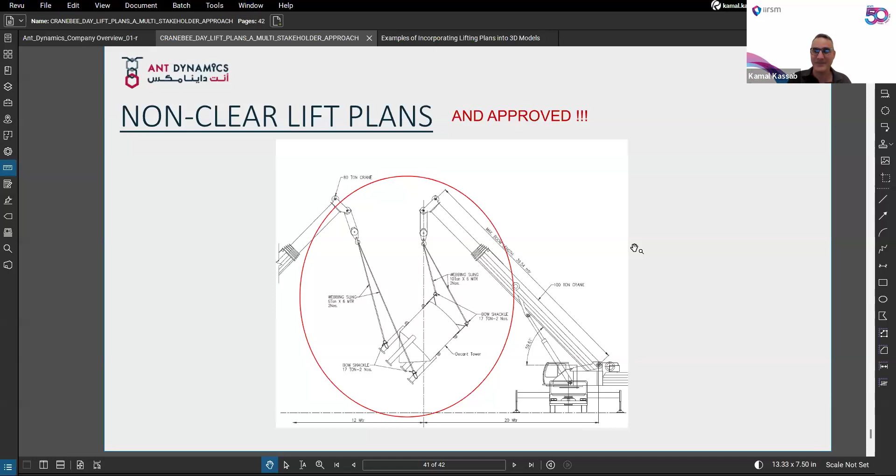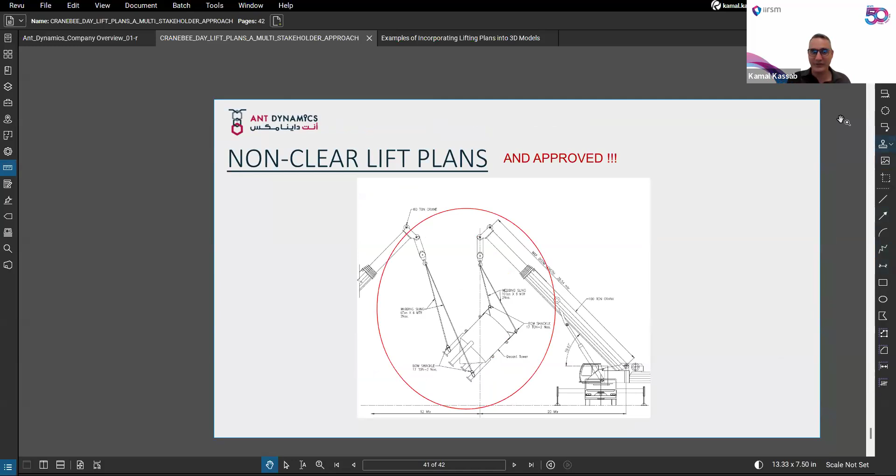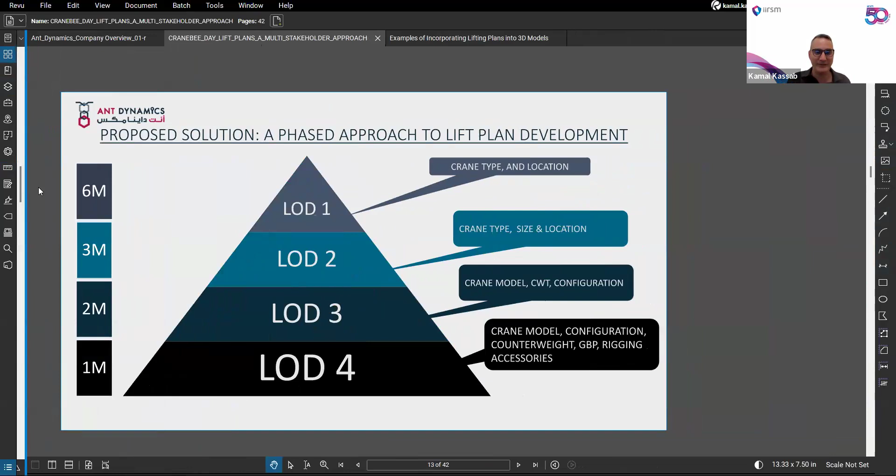So this concludes the lift planning part. I talked about the requirement to start to categorize the lifting plans. I will just go to the most important slide, which I recently prepared. If this one is followed, I think everyone would be in better shape and better coordination. It may look like a laborious process, but I think we can learn from BIM and digital construction and apply it to lifting plans to improve the level of detail, to improve the data collection, and to improve the overall execution of the project.

Having talked about BIM, I will now step into the next discussion, which is where are we heading next? This is where I see the future of lifting plans, and I'm already getting into that. As I mentioned before, we can learn from digital construction. When I first started in this business, seeing a 3D model, not exactly a digital twin, but a recreation in 3D of the plant, was seen as a luxury.

Now, most clients understand that it's important to have a 3D model of the plant for better visualizing, for better coordination, for better execution of the project. And, like I said, we're human beings. It is in our nature to visualize things in 3D. So I will give you examples.

Even other softwares can import scans now, LiDAR scans. You can also do a laser scan. So let's say you have a building and you don't have the drawing of it. You take a drone and scan it, and every year the scans are becoming more and more fancy, more accurate, cheaper, and faster. So imagine where we're going to be heading in 5 years.

Now, the only thing that you can argue against this is, well, what about the permits? Yes, it is not always easy to scan with a drone. You do need permits. It does have to be controlled. However, the good news is that there are now rules in place on how to use drones and to get the permits for utilizing drones.

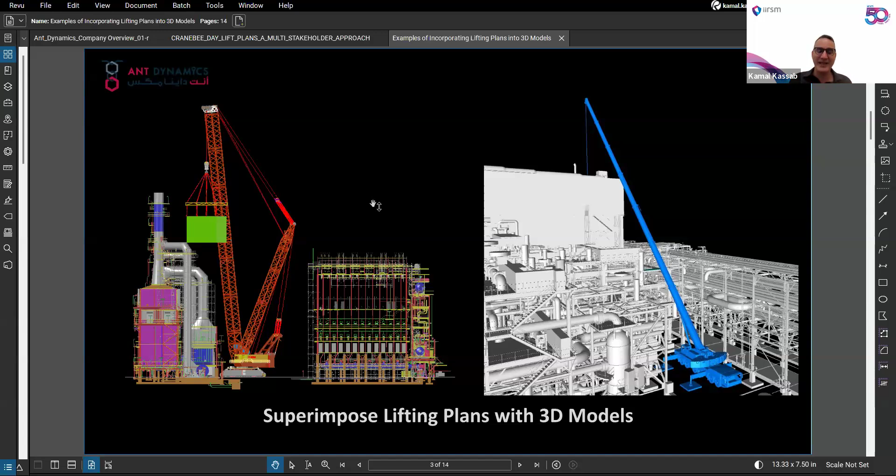We superimposed the crane onto the 3D model and checked it very quickly and found that there were no clashes actually. Same thing here. The client was making a big issue: was the crane going to touch, was it not going to touch the scaffold? Even the scaffold was not easy to show on the drawing, especially when you consider cranes are not flat objects - they rotate, they go at angles. So to do all that in 2D drawings is virtually impossible, man. Really, it's impossible. Always better do your lifting plan in 3D model, superimpose it on the surroundings, and you'll see all the clashes or no clashes within seconds. And that saves a lot of time and money, and also gives a lot of confidence during the execution of the lift.

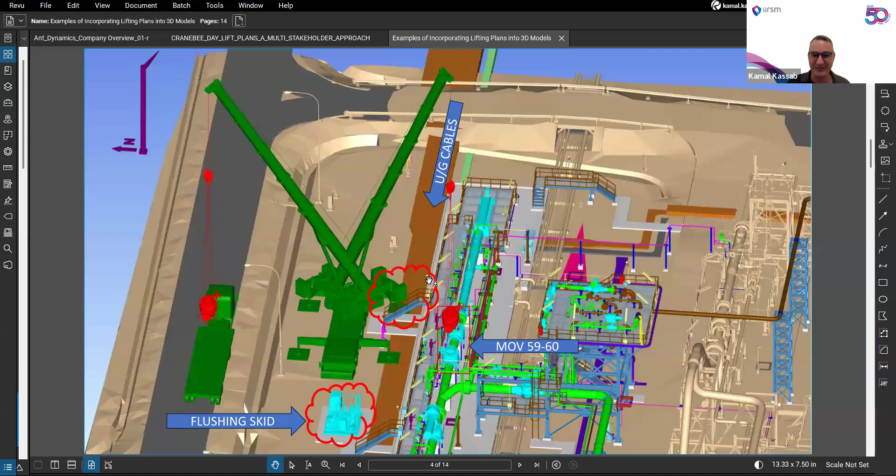So here's an actual case that I had. I did my lifting plan, put it on the 3D model. The plot plan was only showing me 2D, so I was just seeing basically lines. However, when I put it on the 3D model, I could see where the ditch was, see where the paving was. I could see this flushing skid, which I had no idea about on the drawing - it didn't really appear very clearly. So before we went out and submitted this plan, I had the chance at least to ask the site to go and check.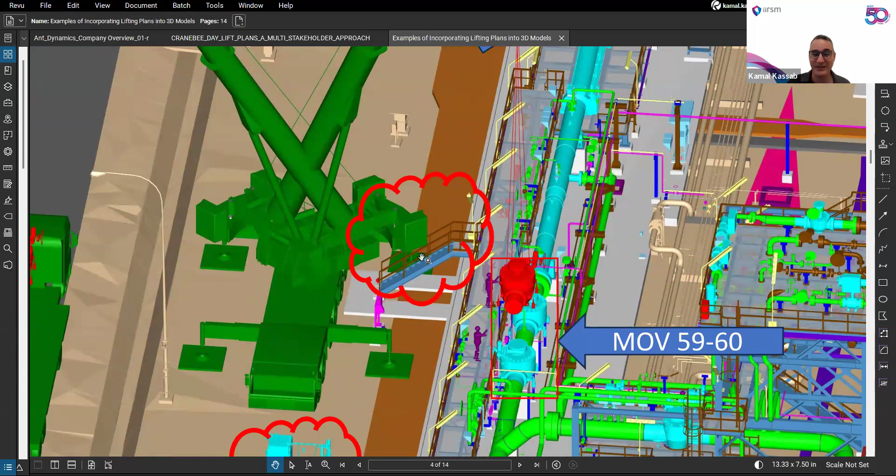For example, this little stair here, that's on a structural drawing. There's no way I could see it on the plot plan layout. So they said, okay, we will go and remove the structure, this staircase, before we bring the crane over, and also we will postpone doing this paving. And there was a ditch here, a cable trench. They also postponed all that because they realized that if we had put the crane in place, it would have damaged all the cables underneath. So this is a very good example of how venturing into the 3D model and using the 3D model with lifting plans can save the company a lot of money, can save all the stakeholders a lot of time and effort. I totally advocate for this methodology.

I think it's only a matter of time before, if I were a client, I would demand all my lifting plans to be in 3D so I could check them on the 3D model and see that there's absolutely no chance of any, let's say, clashes.

And speaking about clashes, some software, CRANEbee again, can import 3D models directly into the software and export into the 3D model directly. So you can import stuff, check directly, and do your lifting plan without having to spend time drawing stuff. Very clear, very easy. All the charts are there, all the crane data is there, the ground bearing pressure is there, and you can start manipulating, move the crane in and out. Very fast, very simple. This is the kind of level 2 planning I would call it - you do your plan before you get into the nuts and bolts of the detailed planning.

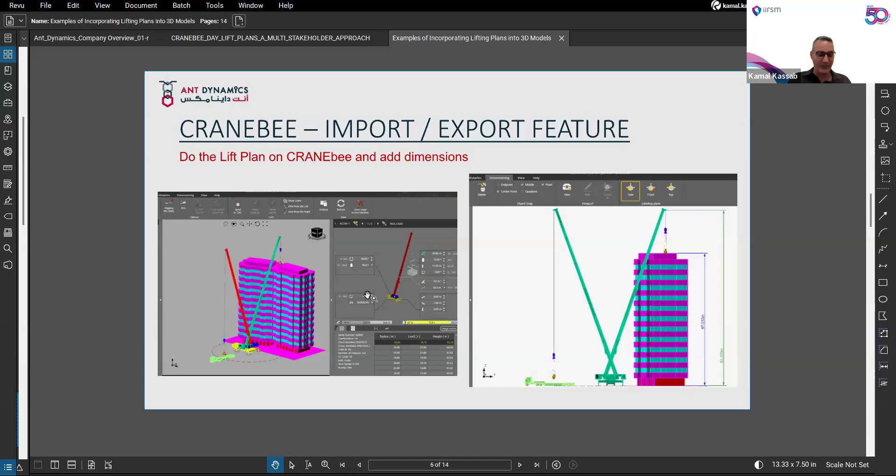Exporting to IFC, so you can export your lifting plan into other formats that another end user can check - maybe the crane is in the wrong place for them, maybe they know something I don't. So if I'm sending this to an electrical team, or maybe for the permit, maybe this goes to the police, for example, maybe this is in a residential area, so you need the municipality to give you an approval. They have to see and they have to understand what is going on also.

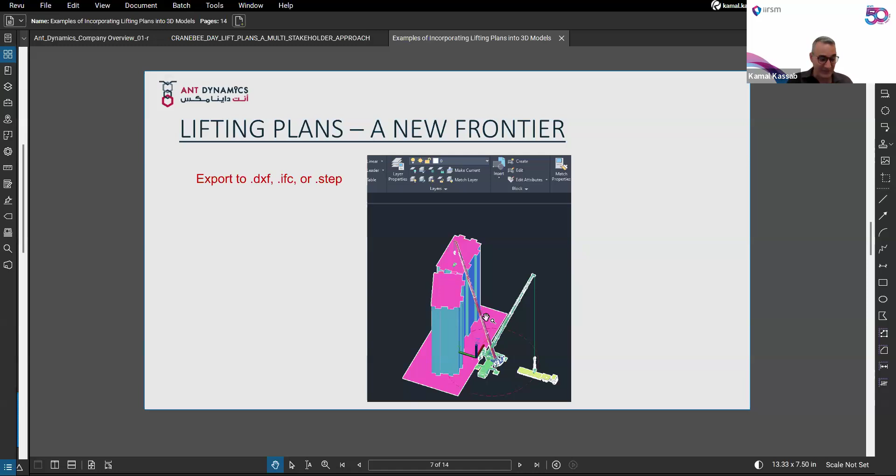I wouldn't expect the municipality to be able to read 2D drawings, especially if they're not drawn correctly or clearly. If they see this clearly, maybe you get your permit faster because it's easier for them to understand.

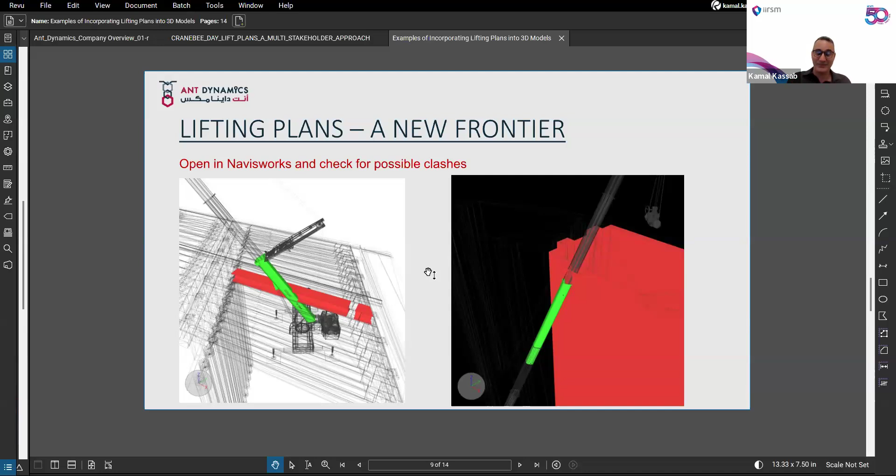Now we can also leverage other tools. You do your lifting plan in 3D, and then you can export it to Navisworks, which can automatically check for any clashes. Here's an example of a crane clashing with a beam. I didn't have to redraw this structure to know that. I just take the crane and the model, put it in Navisworks, a 3D model, and its job is to check for clashes. That's what 3D models are for, and that's a very strong case of a 3D model being used correctly.

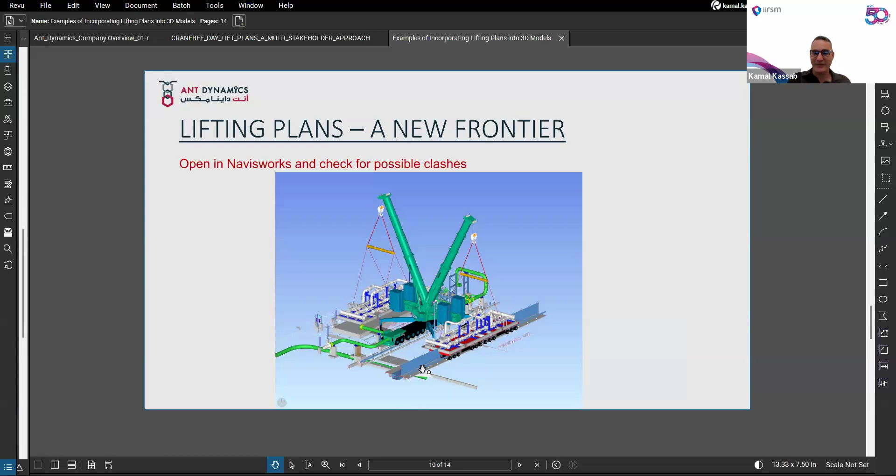Here is a live example of a project I'm working on currently. We're checking if the crane can fit in this area. What are the requirements? What are the holdups? Obviously here you can see a fence. This is a fence here. The trailer's going on top of a pipe, over a pipeline, and the crane is on the limit, and also it is stepping on other foundations.

So to do a proper clash detection, you just add more steps. Again, this is using software. It becomes much easier than to draw all these different steps manually. That's why I always recommend using software for this kind of stuff.

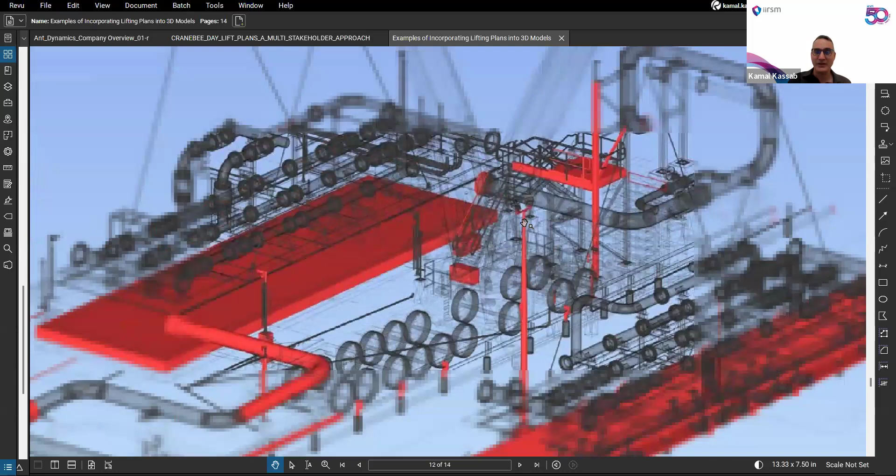When you do that, you can use Navisworks to check the clashes. It will give you all the clashes. It'll tell me, for example, this pipe needs to be put on hold. This little foundation here is in the way. This other foundation is in the way. This light pole is going to be affected during swinging. This structure here is going to be on hold.

Honestly, if anyone's going to tell me that the conventional way of doing lifting plans is going to pick up all these clashes, I would say that's no way going to be the case.

We have to start assuming stuff, or do a lot of site visits, or discover issues when the crane arrives. That's why I say it's always better to invest more time ahead of time, ask all the questions before, see the problems ahead of time, resolve them ahead of time, and then when you come to execute, you don't see any surprises and everything should go smooth. So the crane will finish the job today, and after 2 days we'll go to the next job it's being planned for.

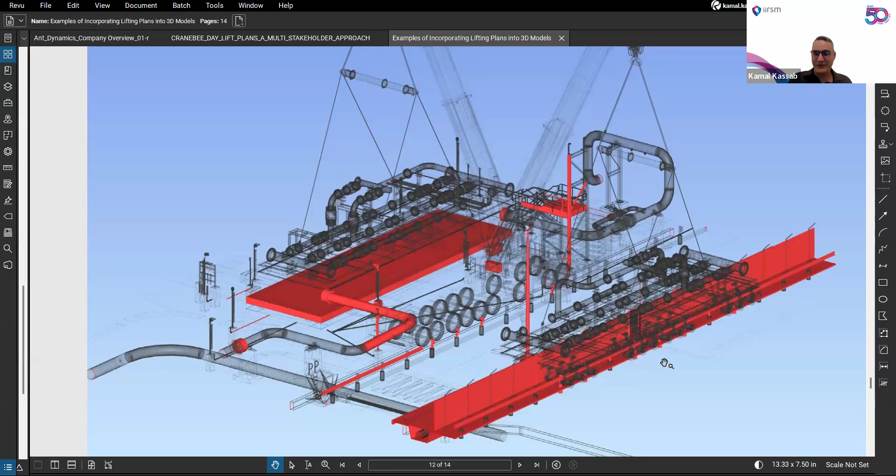This is why I recommend a lot more strategic thinking when developing lifting plans, and to get out of the mentality or assumption that lifting plans are done in one go by the draftsman or the supervisor, with a 'we'll solve it, we'll resolve it' approach. Because when you start doing the lifting plan, you will discover a lot of surprises, and there's a lot at stake while preparing your lifting operations.

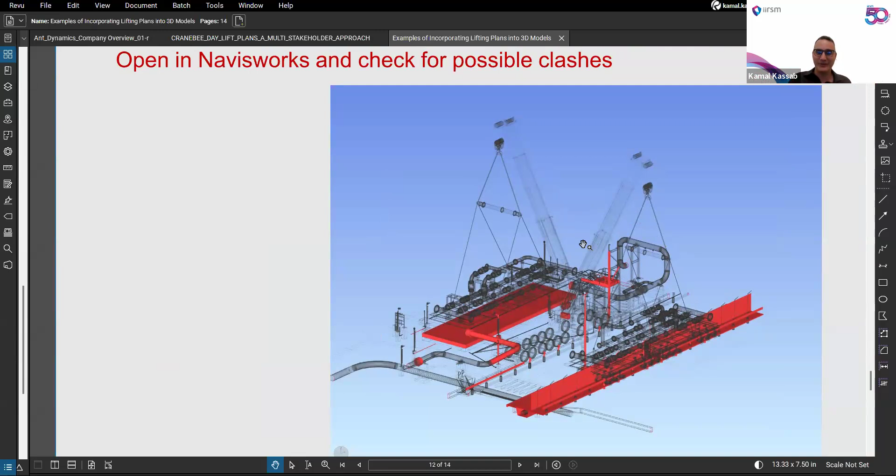Lifting has in the past and is until today a main factor in delaying jobs because of the surprises, because of not so good planning ahead of time.

This is just a gimmick, CraneBee. Also we can export into 3D PDF, so you don't have to every time do a lifting plan and do all the views. You can just send it in 3D PDF, and every PDF now can rotate views in 3D.

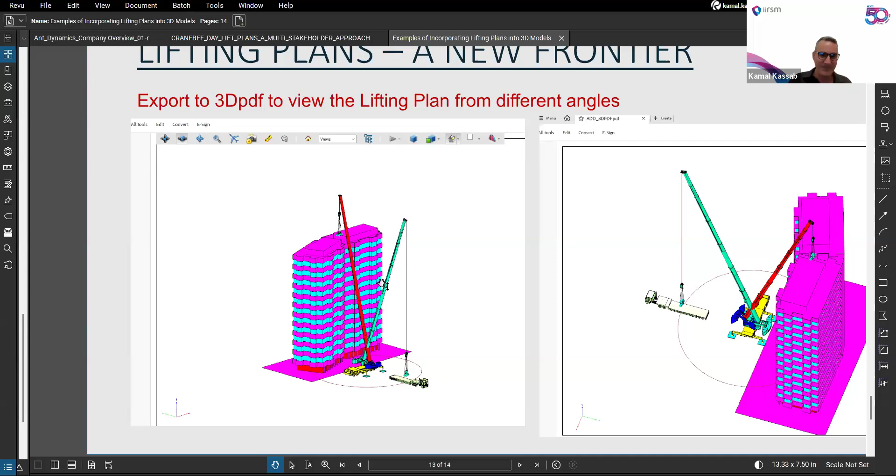My personal favorite now is Bluebeam Revu. Anyone who's using Bluebeam or in engineering, I would recommend Bluebeam because it is tailored for engineers and construction. Adobe PDF does the job, but you can try both and see the difference and judge for yourselves. Thank you very much.

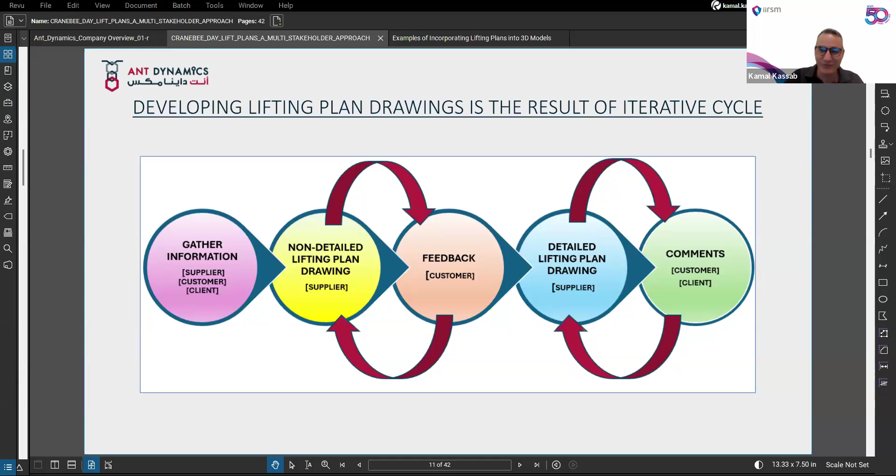Now, did I answer the question? Yeah. Thank you, Kamal. Thanks a lot.